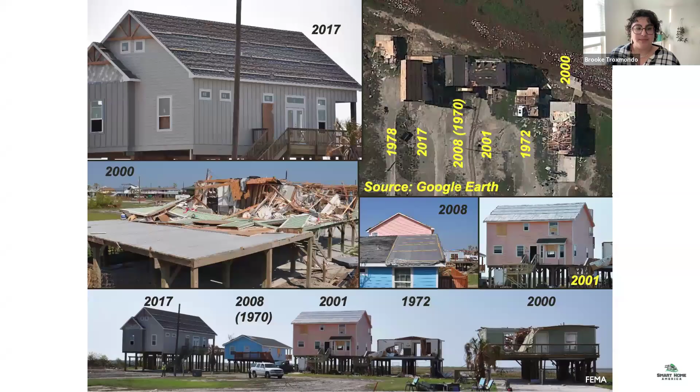Building codes are a bare minimum solution that only work when they are enforced. This picture illustrates how building codes are meant to work.

All of the houses pictured here went through Hurricane Laura in 2020, and as you can see, the more recent the building code, the better the house fared. At the top left is a house built in 2017. It did very well structurally, but if you look closely, the roof panels are missing. The decking is still in place, but the metal roof panels originally secured to this house are gone. Because of the loss of roof panels, it's likely this home had water intrusion through the roof and extensive damage inside. If that was the case, insurance may have still declared this home a total loss, despite how well the exterior structure performed.

Unfortunately, just below it, the house built in 2000 was a complete and total loss—only the foundation is still standing. Looking across the row of houses at the bottom, notice the second house from the left, the light blue house, originally built in 1970 but retrofitted in 2008—it did fairly well throughout Hurricane Laura. But two doors down, the house built in 1972, you can tell by the lack of roof and the lack of doors and windows that that structure did not survive.

And the inconsistency with these results illustrates why we really need beyond-code construction standards.

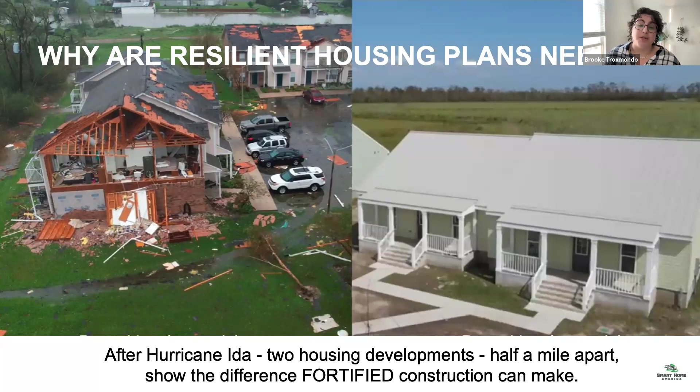For communities like Lockport, this stark comparison underscores why resilient housing planning cannot be deferred until after the next disaster. By implementing enhanced standards and strategic development approaches proactively, planning departments can significantly reduce both physical damage and social disruption when severe weather inevitably arrives.

And that severe weather really is inevitable. In 2024, there were 27 separate billion-dollar weather and climate disasters that impacted the US. And since 1980, the US has sustained 403 billion-dollar weather disasters, and the total cost of those 403 events exceeds $3 trillion.

And those are just the most expensive disasters. We need solutions that help keep us safe and protect our homes so that communities are not displaced after these natural disasters. As I mentioned earlier, building codes can be a first step, but statewide building codes are not consistently adopted throughout the United States.

And where they are adopted, they're not always enforced. And then there are the states that only have jurisdictional adoptions, and the story remains the same where there is not consistent enforcement of those building codes. Current and enforced building codes do make a difference in what communities look like post-severe weather.

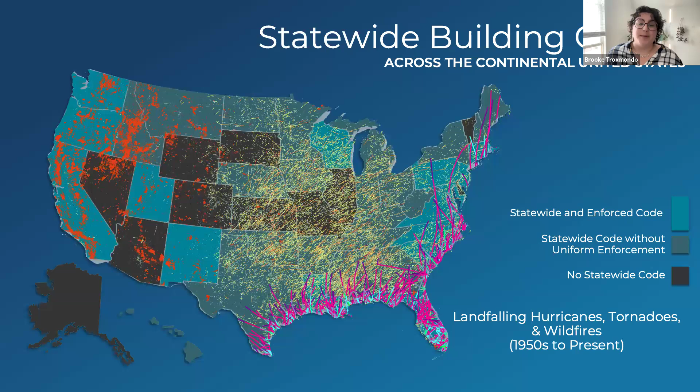So when dealing with severe weather, we need a new paradigm of recovery. And the new paradigm that we propose is intentional resilience.

Think of mitigation as your community's long-term protection plan. Investing in resilient housing, businesses, and infrastructure now means that when the disaster happens, communities can rebound faster. This can lead to dramatic savings in recovery and rebuilding costs, and neighborhoods that stay intact, leading to more resilient communities. Studies have shown that for every $1 spent pre-disaster, it saves $6 to $13 in post-disaster recovery costs. When you think about it, preparation beats reaction every single time.

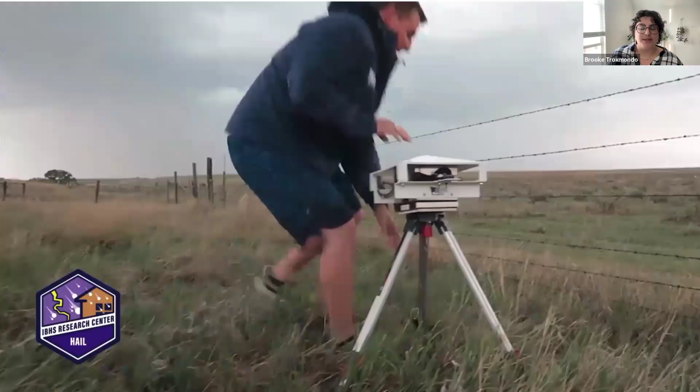So let's take a closer look at the research center. It features a 6-story test chamber the size of an airplane hangar, with more than 105 fans capable of generating 130-mile-an-hour winds. They conduct extensive research in hail, inventing new ways to generate realistic hail to support their testing. On wildfire, they are the only known facility able to test how embers interact with the built environment. They also study water intrusion through the roof and how to seal it out, and they study the effect of wind on homes to learn how to reduce loss.

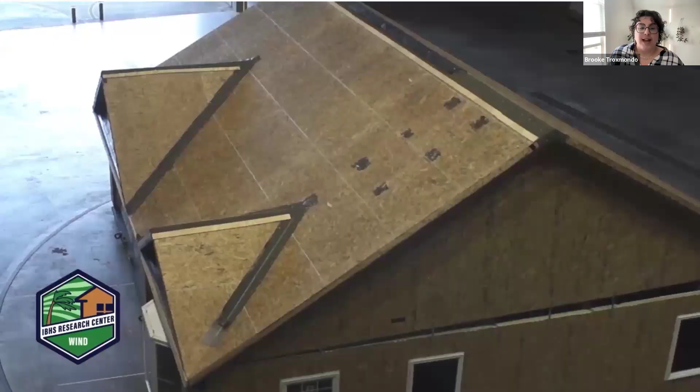Their research extends into the field, where they learn what happens after disasters. They study the effects of severe weather on commercial structures as well as houses. And at full scale, they can recreate severe weather so scientists see what fails first and understand what we can do to protect the investment of homeowners. Severe weather disrupts lives, displaces families, and drives financial loss, and IBHS brings together the science and expertise to reduce, and in some cases eliminate, costly risks.

So we're going to do a little quick pop quiz just to make sure you're awake and still with us. I know this is kind of the after-lunch hour for people on the East Coast. So the first quiz is a real easy question, just true or false: are building codes well enforced across the United States? True or false? Let's see what you guys think.

Awesome, you guys are awake and with us and paying attention. 93% of folks got that right, it's false. Building codes are not consistently enforced throughout the United States. Now I'm going to hand the presentation over to Candace to go a little bit more in depth into Wildfire Prepared.

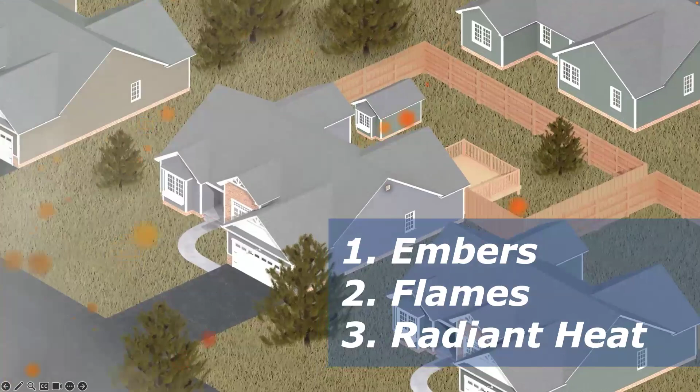So let's talk about what happens when that conflagration unfolds. Wildfires have three ignition mechanisms: embers, flames, and radiant heat. When wildfires enter a community, all three ignition mechanisms are happening and contributing to the spread. Embers are often how fire first enters a community. When those embers ignite spot fires around structures, or ignite structures themselves, those ignitions lead to more embers, which lead to more flames and more burning structures produced from that radiant heat. All three can ignite other structures, and structural embers are typically larger than vegetative embers.

Adding wind to the mix only makes conditions worse, literally fanning the flames and carrying embers deep into suburban neighborhoods. One of the most important vulnerabilities to conflagration are the connective fuels inside communities, especially the vegetation. Connective fuels can also include things like fences that create pathways for fire to spread through communities. We'll see in a minute how wooden fences can help ignite structures.

During wildfires, thousands of embers can travel more than a mile ahead of the main fire. During a wildfire, embers may collect in zone 0, which we're going to talk about and define here in just a minute, also known as the home ignition zone. And when this happens, they smolder, ultimately igniting and spreading to the home itself.

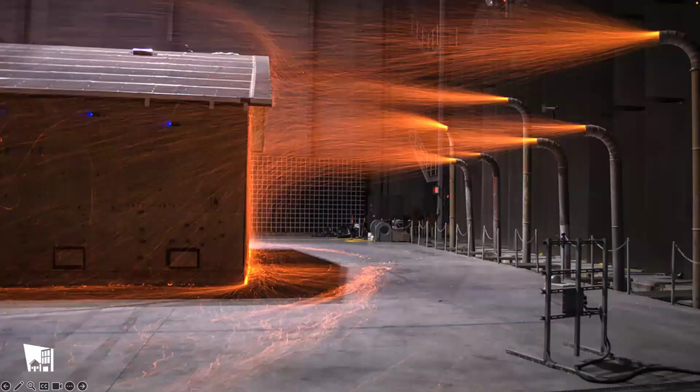So we're going to talk about 5 feet completely around the home of non-combustible space. This is the home ignition zone. Embers collect at the base of a vertical wall and in the first few feet around the building itself. That's why a wildfire prepared homeowner must have 6 inches of vertical non-combustible space at the base of the home, and then 5 feet of horizontal non-combustible space around the home itself.

Because of research like this, we know the importance of these 2 elements, which you see on the screen here. Entirely non-combustible is even better, and that's in the plus designation, which we're going to break down in a few slides. This research allows us to make the program more accessible because we understand how the home system works together. By having that 6 inches at the very base, that stops embers that have collected from being able to ignite the home itself, and the 5 feet around also keeps the vegetation and combustible materials from igniting that flame.

IBHS has taken their research and created the program called Wildfire Prepared Homes. It's a voluntary designation program, and the program is meant to make a meaningful distinction between a property that is designated and an unmitigated or partially mitigated property.

So speaking directly to the Wildfire Prepared Home, that home is going to have a Class A fire rated roof, maintained clear of debris. It's going to have non-combustible gutters and downspouts. The building features will include ember and fire resistant vents, and 6 inches of vertical non-combustible space at the base. It's also going to have a defensible space around it, including the removal of branches that may overhang your home.

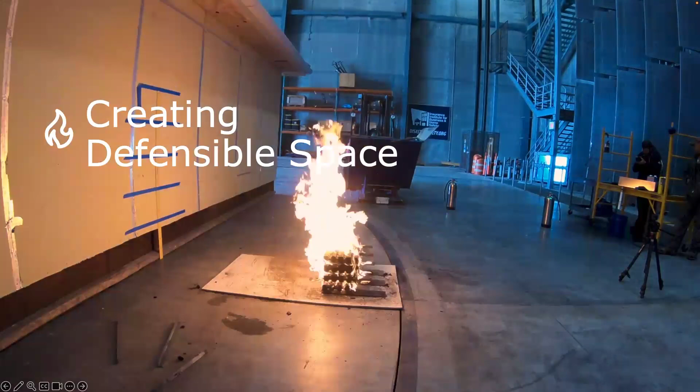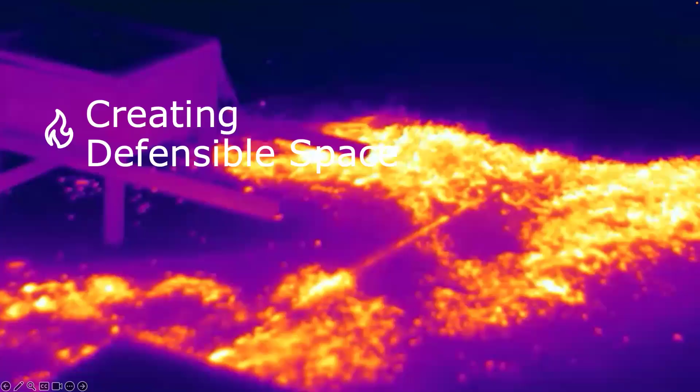Starting with the defensible space, all of the testing done by IBHS simulates real-world wildfire conditions, testing various wind speeds and directions while measuring ember ignition at different distances from the structure. The results were definitive: a 5-foot non-combustible zone provides critical protection against ember ignition. This isn't just an estimate or a recommendation, it's a scientifically verified measurement based on rigorous testing done at the research facility.

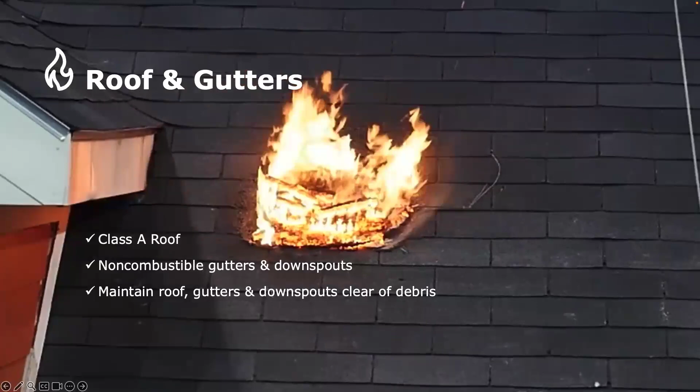The roof would be a big retrofit to a home, but it's an important one because the roof is a large surface. It's one of the most vulnerable parts of the home, especially with embers traveling far distances in front of the fire and having the potential to land on the roof or in the gutter. The embers can ignite anything combustible, like wood-shake shingles, plastic gutters, and acrylic skylights. Also, tree debris can collect in the gutters, providing fuel for embers to land on and ignite. When ignited, the fascia, the roof edge, and the attic are exposed to direct flames.

The good news, though, is that most homes already have a Class A roof. Asphalt shingles, clay and concrete tiles, metal roofs - all of those are typically Class A, and gutters are typically made of aluminum, leaving only routine maintenance to keep the roof and gutters clear of debris.

I don't know about you guys, but I keep things up there like Christmas decorations and boxes left over from packing that I don't need anymore. When those embers get in, that's a perfect - and I hate to use the word perfect - but it's a perfect storm for those embers to create a fire that just completely and totally destroys the home.

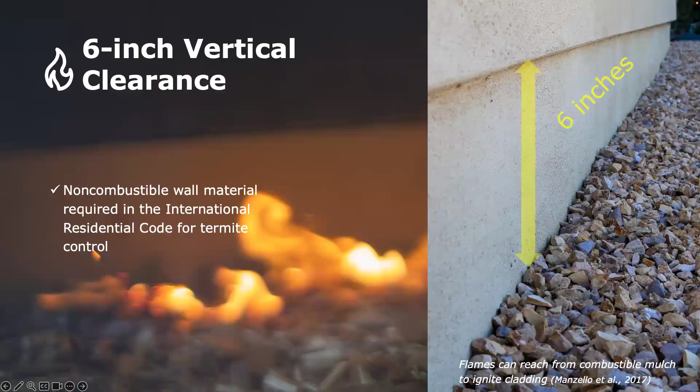A little closer look at the 6 inches at the bottom, at the base of the home - keeping that clear. In a wildfire, embers will accumulate down at the bottom and base of the exterior wall, and that's where those embers could combust the mulch, which then turns around and ignites your home. That also plays into the 5-foot zone, breaking the pathway for small flames and ensuring embers have no fuel source to land on.

Zone 0 allows other mitigations, like that 6-inch vertical non-combustible clearance and multi-paned tempered glass, to have a positive impact on the outcome of that home during a wildfire.

I'm going to show you a video now, and to me it's a pretty powerful video. It's only 60 seconds long, but I want you to really pay attention to this video and the amazement, to me, of how quickly this happens.

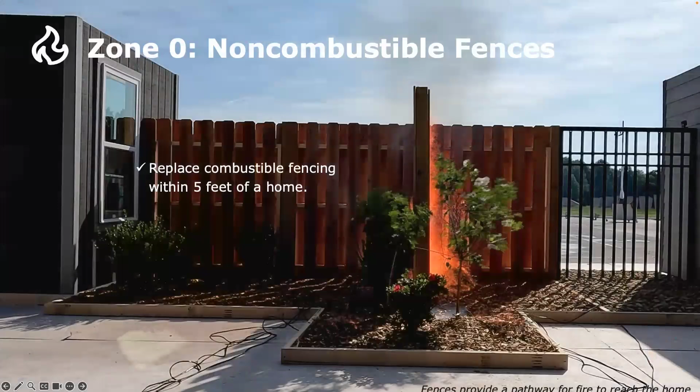When we say everything in zone 0, we mean everything in zone 0. This includes the fences that connect to your home. Simply replacing the last 5 feet with a non-combustible section or gate breaks that pathway. It doesn't give fire the fuel it needs to continue on to your home or structure. You can see the impact here in just a moment.

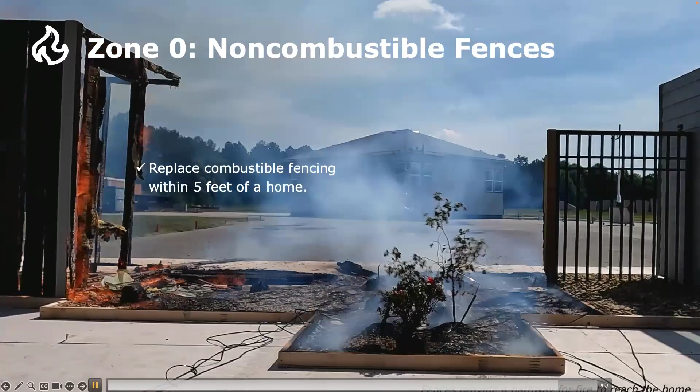Think of it as creating a fire break specifically for your fence line. Embers may still land on and ignite the wooden portion of your fence during a wildfire, but the fire will stop at the non-combustible section rather than continuing to the home's exterior. It's a simple modification that doesn't require replacing the entire fence, just the critical section within 5 feet of your house. It's an affordable upgrade that can save your entire property when wildfire is threatening your community. Remember, breaking that path of fuel means embers can't ignite the house via the fence itself.

Decks and porches that are attached to or built near your home also provide a pathway for fuel for the fire to reach your home. At a minimum, they need 5 feet of non-combustible zone around them as well. A clear area beneath the deck, enclosed to keep embers and debris out, means there's nothing to ignite and cause a fire to the structure.

Embers blown from miles away can easily start spot fires around your house. Creating and maintaining a defensible space on your property slows down the spread of the fire. By spacing out bushes and trees, you're also removing the ladder fuels that allow fires to spread, reducing the intensity of the fire near your home.

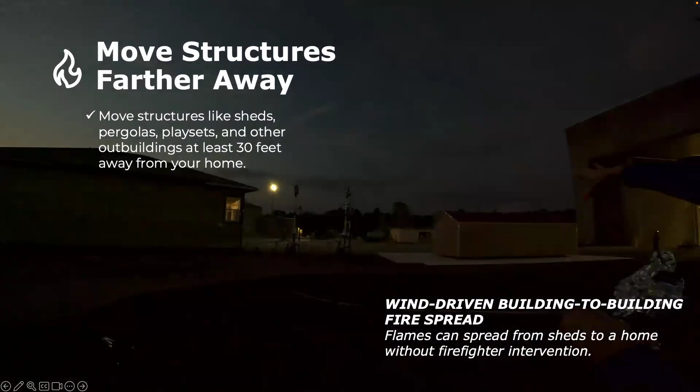This video is of one of the first IBHS experiments done with wind-driven building-to-building fire spread from auxiliary structures, like man caves, she sheds, where your gardening materials are, that sort of thing. Burning the sheds, pergolas, play sets, any other structure, wooden play sets, doll houses, increased the risk to the home because of the additional radiant heat and flames, and also the embers that are produced. If you move these accessories further away, you are better protecting your home in the long run.

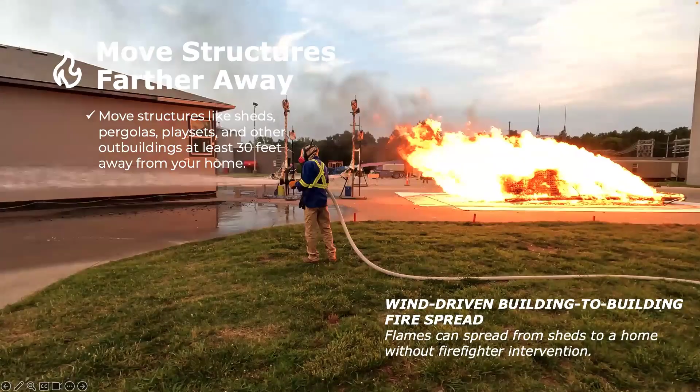Adding gutter covers reduces maintenance by keeping tree debris out. These covers prevent the accumulation of dry leaves, pine needles and twigs that could serve as kindling for flying embers during a wildfire event. By eliminating this potential fuel source from your roof's edge, you substantially decrease one of the most common ignition points during a wildfire. I have pine trees all around my house, and nothing is more irritating than having to get on the roof and get those pine needles out, but it has to be done. By doing that, you're significantly reducing the chance of ignition from those foreign materials.

Radiant heat can build up in an open eave and ignite exposed materials. Flames from nearby fuel sources, such as sheds or vegetation, can ignite those eaves. Radiant heat, embers, and flames can also ignite combustible siding. Replacing all combustible siding provides greater protection against flames and radiant heat. Flames can spread across combustible siding to reach other vulnerable areas like windows and eaves, which can begin a cascade of damage to the home.

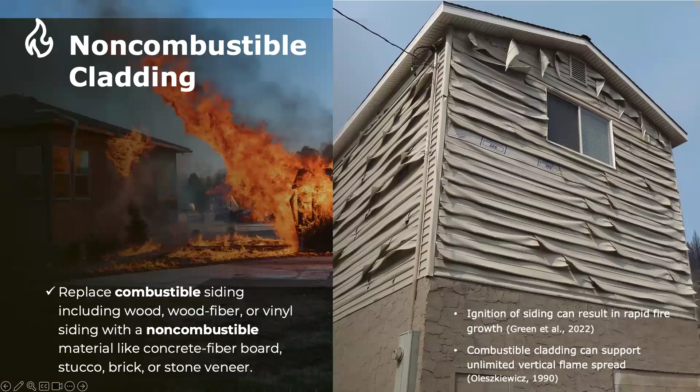Upgrade to solid doors that have a metal threshold and are constructed with a non-combustible or ignition-resistant material such as metal, fiberglass, or solid hardwood. Remember that 6 inches worth of space that we mentioned. We want to stop those embers from even getting started to begin with. By putting one of those metal, fiberglass, or solid hardwood doors on there, you are lowering the chance that those embers will be able to start a fire in the first place.

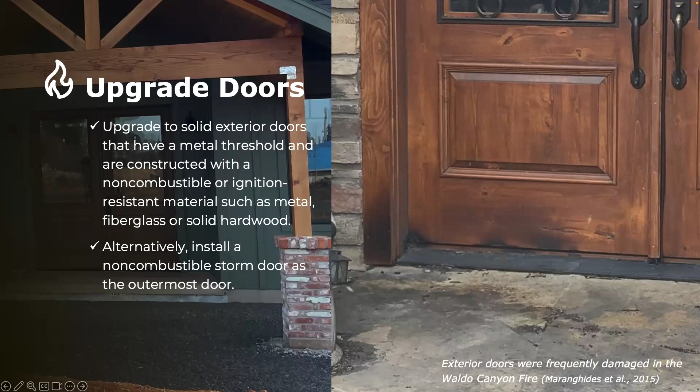Alternatively, you could install a non-combustible storm door at the outermost door of your home. Replacing that combustible siding, including wood fiber and vinyl siding, with a non-combustible material like concrete fiberboard, stucco, brick, or stone veneer is also recommended.

So this is a video that's going to start here in just a second. We're looking obviously at the attached deck in this video. It's a vulnerable point on the home and can be a pathway to carry the fire to your home itself. If you look at the mulch, you can see the black circular areas where vegetation has been ignited. This represents how embers can start spot fires, and when given a pathway to the home, can present a risk for ignition of the home itself.

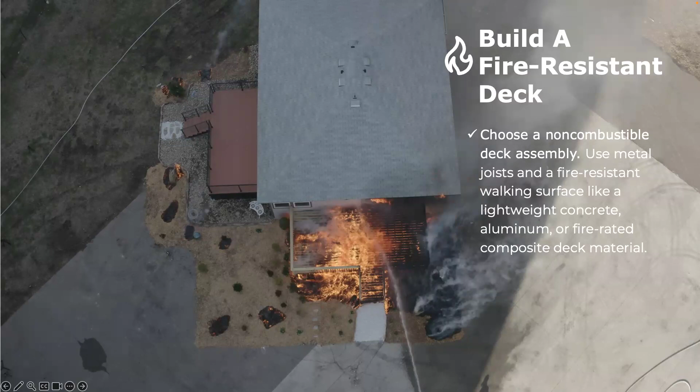Notice on the left-hand side, it has that 5-foot non-combustible zone surrounding a non-combustible deck assembly. That's eliminating the combustible material, which creates that protective barrier on your home. So by putting that barrier up and using a non-combustible material, you're stopping that fire from being able to get to your home from the very beginning. If you look over here, you can see where some of those spot fires were, and you see how close they got, but also how far they were kept away from the home.

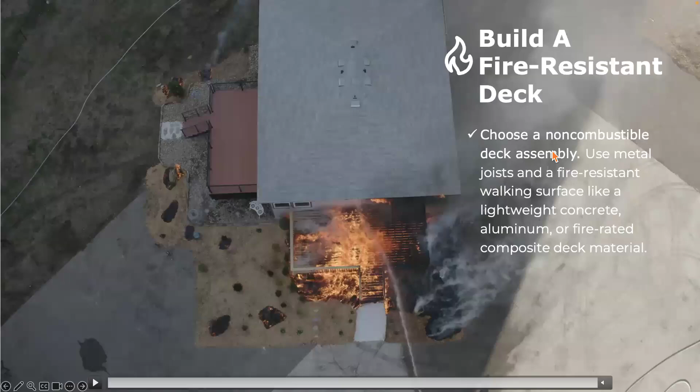Back-to-back fencing, in those gaps that are there, you can get debris trapped - limbs, pine straw, trash, anything along those lines - and it creates a vulnerable fuel bed to ignite both fences. The two fences together provide even greater fuel for an even more intense fire.

IBHS has a thorough process for issuing designations to make sure that homes meet the wildfire prepared standards. Again, all of these standards can be found on the Wildfire Prepared website. Yet receiving a designation is honestly just the beginning. There are ongoing components to the program because of maintenance required to maintain that designation. So it's not just a one-and-done kind of thing.

Property owners would be responsible for maintaining the designation. And I always like to make sure, especially when I'm talking to developers or builders, that you are aware - yes, doing these things in the beginning is great, but you need to be sure that if you get these designations, whether it be this one or the one we're going to talk about with the high wind standards here in a bit, make sure that the homeowners are aware and understand what they need to do to continue to keep that designation.

To get started, the Homeowner's Guide explains the technical requirements of the program, why each of these elements matter, and all the things that the homeowners need to know, honestly. It even explains how a golf tee can be used to make figuring the vent compliance a little bit easier. While the information is geared towards homeowners, because a lot of this can be a DIY mitigation approach to a point, builders and developers can use the same resources to implement wildfire prepared homes for customers or for projects that you are working on.

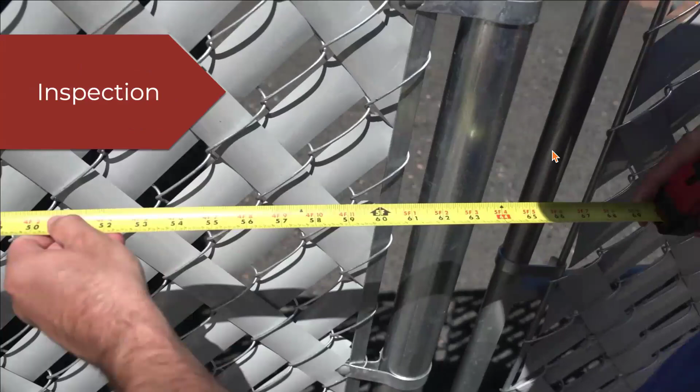Then the homeowner is going to submit their application into the system. Once that application has been submitted, an inspector will come out. A home inspector will visit the property and do a walk around to verify that everything from the home assessment is accurate.

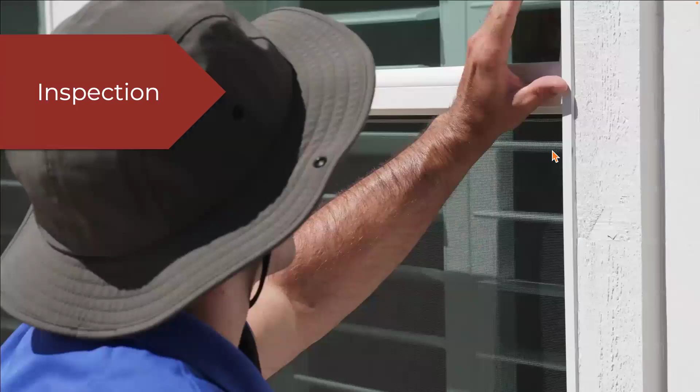You can see this inspector out with a measuring tape, making sure there's at least 5 feet or more. They're measuring the distance for the zone around the gate to stop fuel from coming from the wood fence itself. The company used by the IBHS program, they are the inspectors that come out.

Step 1 is to choose a time that works best for you to get on a call with the inspectors. They'll collect some basic information, answer any questions, and schedule a consultation. During the consultation, a wildfire risk specialist will assess the property and provide guidance to help you along the way. You'll get a digital report and a custom treatment plan that prioritizes actions to protect your home or to meet the insurer's requirement, including the wildfire prepared home designation.

Step number 3 is take action with simple projects. Some of them can be tackled over a weekend, or you can get help from a vetted contractor to help ensure that the job is done right the first time.

Then we move to step number 4. When you're ready, you schedule a final inspection with the company to document everything for your insurer and or to go ahead and submit it for the wildfire prepared home certification.

IBHS will then take the documentation submitted by that third party inspector and issue a designation. The designation demonstrates that the homeowner is committed to wildfire resilience, differentiating properties that have implemented advanced wildfire mitigation methods versus those that have not.

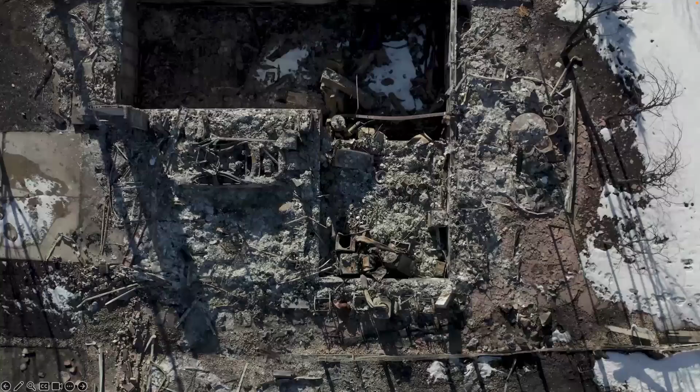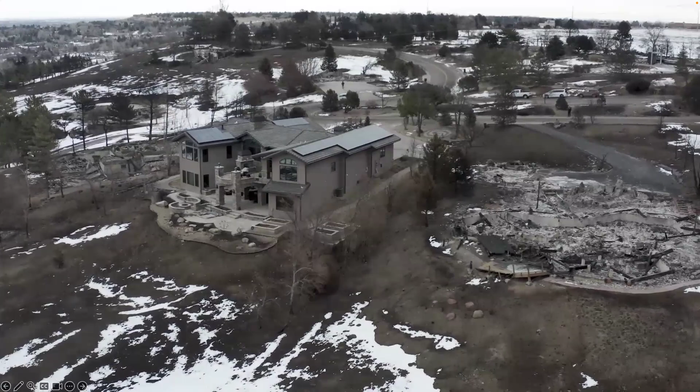When we put all of these factors together, you can get devastation, or you can significantly increase your chances that your home will survive. Dr. Jack Cohen, who many consider the father of wildfire science, says community wildfire risk should be defined as a home ignition problem, not a wildfire control problem. That is to say, we can't suppress or control our way out of a wildfire crisis, but there are things we can do and policies states can embrace to help reduce the likelihood of neighborhoods looking like what you see on the screen here. Sorry, my brain gets lost sometimes just seeing the devastation and destruction these fires can cause.

To advance resilience, we believe three tools are necessary: a statewide WUI code, statewide defensible space requirements, and financial incentives to help homeowners retrofit their existing homes. California is leading the way with a statewide WUI code and a grant program for resilient retrofits. Because mitigation at the neighborhood scale is so important, we recommend taking a clustered approach to grants and incentives to help the whole community act together.

Voluntary designations are helpful, but they're not enough. We also need wildfire policies at the local, state, and federal level to reflect what science currently tells us about how to prevent homes from igniting during a wildfire.

So we are going to have another pop quiz. I know we gave you a lot of information, but it's just going to cover the things I've talked about with you thus far. The question is, how much space around a home should be completely non-combustible? Is it 3 feet, 5 feet, 7 feet, or 9 feet?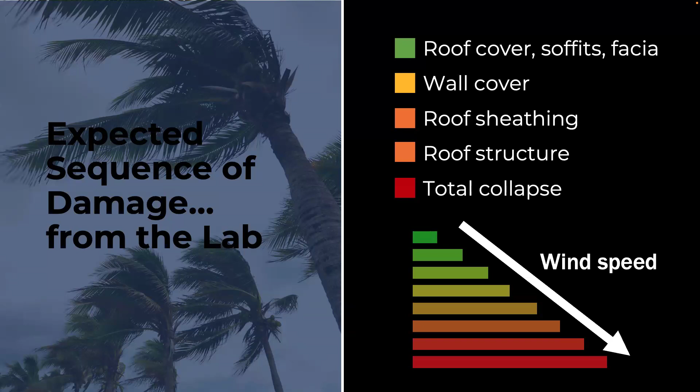So like I mentioned: roof, soffits and fascia, the wall cover, roof sheathing, and the roof structure. And then the final step is total collapse of the home or built structure.

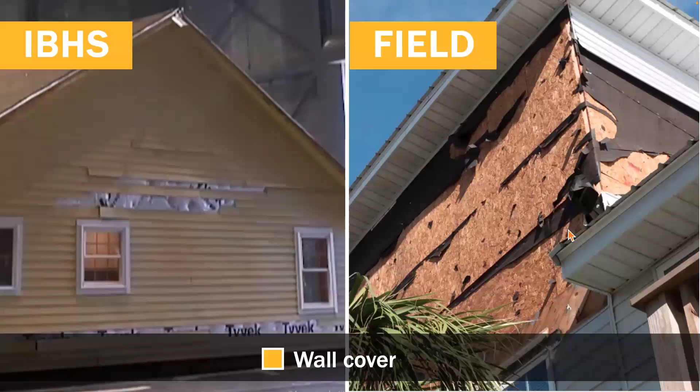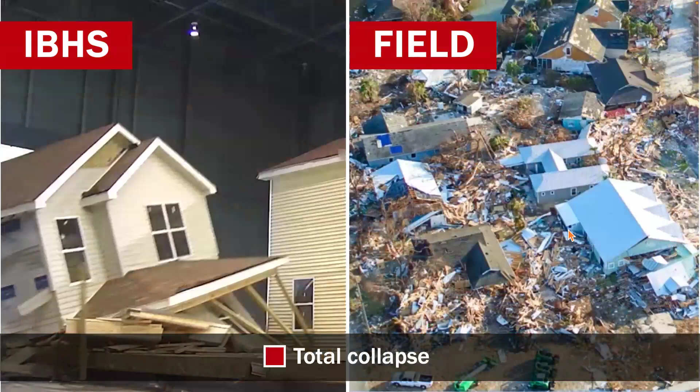So we also have some pictures that really emphasize how the research done at IBHS is supported by what we see in the field after a disaster. At the lowest level of high winds, we have the roof cover, soffits, and fascia affected. Then as the wind speed increases, the siding and wall cover can start to be affected. As wind speeds continue to increase, roof sheathing and the roof structure can be destroyed. And at the highest wind speeds, the buildings can completely collapse and be blown away.

So this is really important to notice how closely the damage we see in the IBHS research facility mimics the damage we see out in the field. And it really supports the validity of the Fortified and the Wildfire Prepared Home standards.

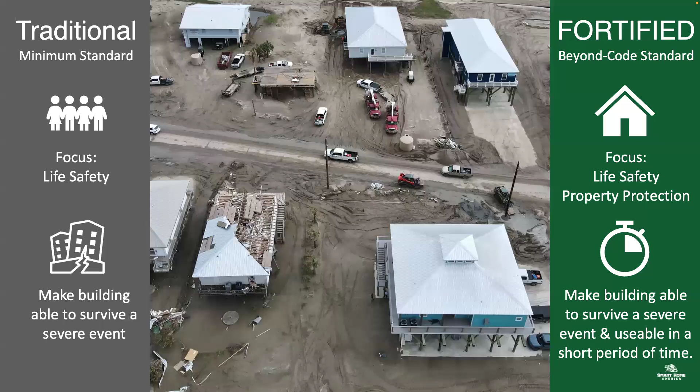However, Fortified really tries to protect both human life and the property itself. The goal is for the building to survive a severe weather event and to be reusable quickly by protecting the interior of the building and its contents. And I'm going to hand it back over to Candace, as she's going to go into a lot more detail about what these fortified standards are and how you can use them.

And we're not just talking about hurricanes here, we're talking about high winds, whether it be tornadoes, straight line wind, derechos — all of that is included in that protection.

We can't prevent all of the damage that you see here. In May of 2013, a devastating EF5 tornado ripped through Moore, Oklahoma. We can't prevent the EF5 damage that you see on the screen right now, but what we can do is address some of the damage that you're going to see in the EF3, and we can totally eliminate the damage from the EF0, EF1, and EF2 lines of damage.

When that tornado came through Moore, Oklahoma, when it touched down, the total path of that tornado was 17 miles. Of that 17 miles on the ground, less than or right at 0.0012 square miles were actually affected by the wind speeds that would equate to EF5. And for the EF4 wind speeds, it was 0.46 square miles that were affected. So less than half a square mile was actually affected by those EF4 and EF5 winds.

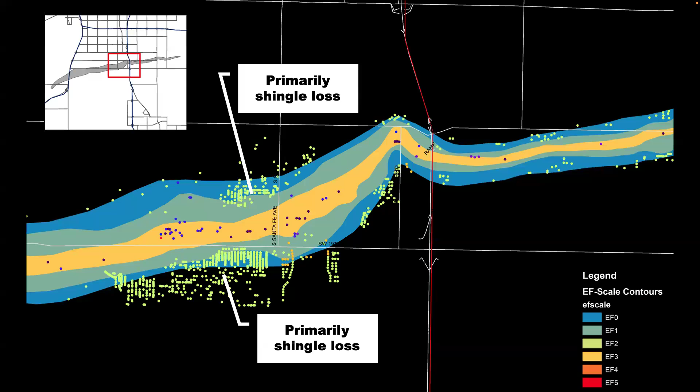Homes that might have sustained just minor damage and been livable instead become uninhabitable due to the water intrusion coming into the home and the need for sheetrock to be pulled, carpet to be replaced, and all of the belongings to be replaced. Residents who could have remained in their house despite the exterior damage now become displaced. Building to the fortified standards could help communities stay intact after a tornadic event.

46% of single-family home damage modes are addressed in some element of fortified, based on that Moore, Oklahoma EF5 tornado.

You've heard me say the word fortified home quite a bit, and you heard Brooke say fortified as well. What is fortified? It's a voluntary program verified by an independent third party. There are 2 standards, hurricane and high wind, and 3 levels within those standards: roof, silver, and gold. Each fortified level builds on the one before it. Therefore, all fortified homes have that fortified roof designation. A silver designation will also have a fortified roof, and gold will have both silver and roof involved with it.

If you live along the coast, you're going to be under the fortified home hurricane program. It's very similar to the fortified home high wind program, and we'll talk about the differences in just a second between the two. A fortified roof will keep the roof on and keep the water out.

When we address fortified silver, it's looking at reducing the damage amplifiers, like the garage door Brooke showed us a photo of. You still have that fortified roof, and you're adding strengthening to the gables, a wind-rated garage door, securing the chimney to the house, and anchoring your porches or carports. For hurricanes, you must also have opening protection against debris impact with some sort of hurricane shutter.

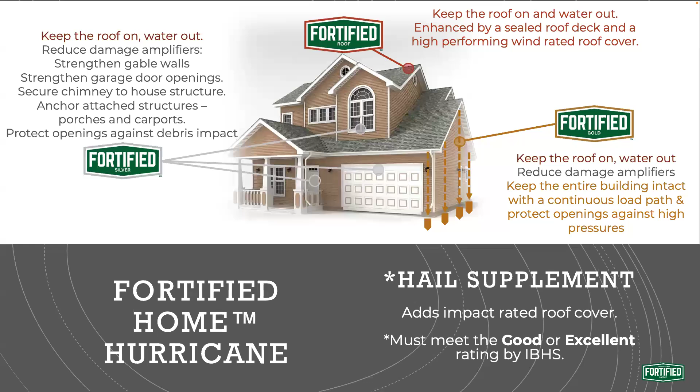For fortified gold, we're including all of those things we just talked about, but we're incorporating a continuous load path and protecting the openings against high pressures. For all levels of fortified, there is a hail supplement that can be added. This adds impact-rated roof covering, which must have met the good or excellent rating designated by the Insurance Institute for Business and Home Safety.

For the fortified home high wind standard, we're looking at keeping the roof on and the water out. It's got an enhanced roof deck and that high performance wind rating. For silver, it's the same as the roof, but then we're reducing those damage amplifiers: the gables, overhangs, securing the chimney to the house, and anchoring the structures, porches, and carports. With fortified gold, it puts that continuous load path in. Keep in mind the hail supplement is also available for this high wind standard.

High wind is going to be more for your inland areas that are more likely to be affected by tornadoes and straight line wind. All of those are going to fall into that category.

So let's start with the fortified roof. There are 3 principles we look at: we want to nail it down, seal it up, and lock it in. With nailing it down, fortified roofs require that the roof deck be re-nailed with 8D ring shank nails. Ring shank nails and a tighter nailing pattern are used to double the strength of the pull off, or uplift resistance, just by using a different nail than the common smooth nail, and putting a tighter nailing pattern into the rafters. So when wind gets into the attic, you've got that extra protection to keep and hold the roof deck onto the house, because the roof is such an important piece to the puzzle.

We talked about this already, should have clicked the button, my apologies. Here's a shot of that 8D nail. If you look closely, the difference between a smooth nail and an 8D is the grooves on the nail. One of the other requirements for the nails is that it has to be long enough to have appropriate penetration from the roof deck into the rafters.

Staples and 6D nails are not allowed in the fortified program. Here are some examples for you to see of roof decks that were damaged or torn off because they were not fastened adequately. That's a lot of space for water to come into the home, especially that picture on the right.

Keep in mind that most of the time wind is not just falling straight down onto a home, it is coming at an angle. That is a huge gap for water to be able to get underneath that roof deck. And if you look at it, you can see where that roof deck has bowed, so we know there is water damage on the roof deck and on the inside of it.

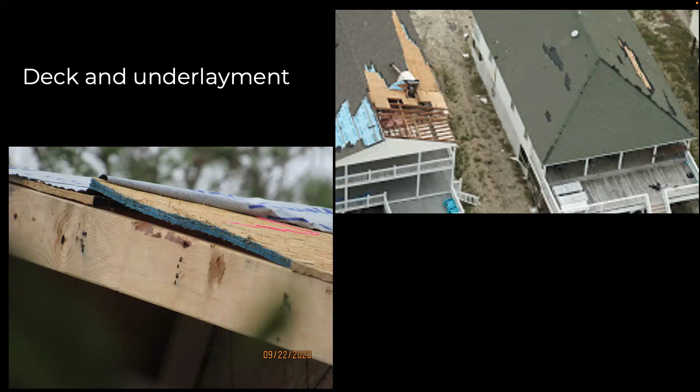The next piece here is going to be keep the water out. From the looks of the screen, where it's highlighted, you can see that black tape over the seams of the roof deck. I'm going to show you a demonstration here in just a second, and pay special attention to the left-hand side as this video gets moving.

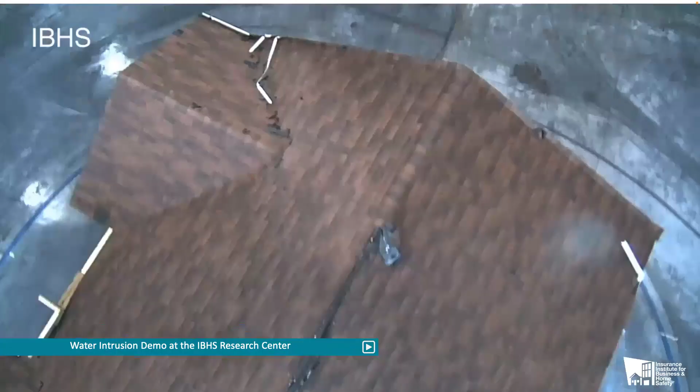That's where you'll see the tape on the left-hand side. So for water intrusion, if 60% of the 8 inches per hour of rain hitting this house, which is 7 bathtubs, is getting in once the roof covering is lost, and sealing the seams of the roof deck can keep up to 95% of that water out, why would we not do it? Especially if it's going to cost you $500.

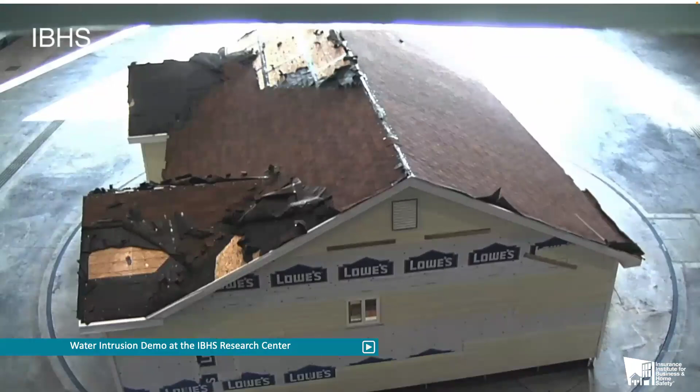This duplex was placed inside of the research facility. It is built to the exact same standards on both sides, the standards usually seen around the Gulf Coast and Atlantic regions. The home is put on a railroad car turntable so the house can be twisted and turned, so all sides can be hit equally with the same amount of wind and the same angle of water hitting the home.

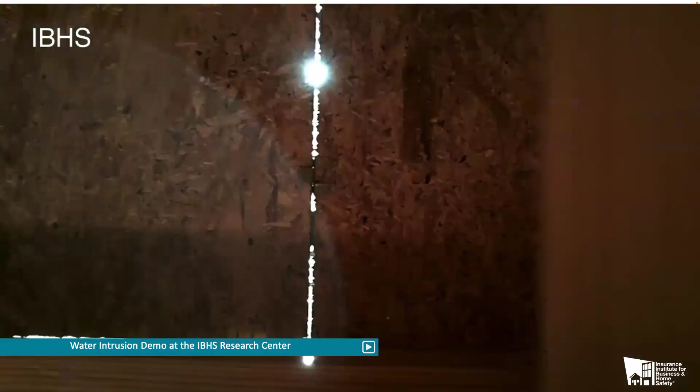You can see that the home was furnished with complete furnishings. We have the light fixtures that the water is pouring around. Good shot of the gap in that roof deck and how easily water gets into it. So they hit this house on both sides, and they got a shot here of the water coming through into the insulation and weighing it down.

This is the result on the right-hand side. The insulation gets heavy, it causes the roof to collapse and fall in, which leads to more water intrusion if this happens before the rain stops. There's no way that this home is livable directly after the storm. A family could not come back and be there.

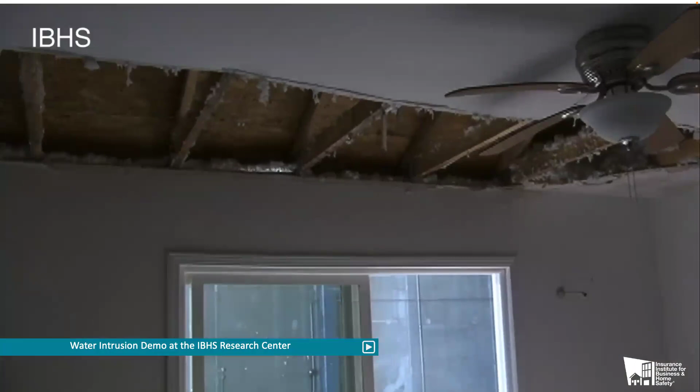On the left side, which had less than $500 worth of tape on it, it looks really good. If you were paying close attention, you would have noticed a little bit of insulation on the floor, on the bottom left-hand side of the screen. That came because wind got into the attic and blew the insulation on the dry side around, and when they opened the hatch, that insulation came through.

The moral of this, though, is that after the test was shut down and individuals were able to walk into the home, that left side was completely dry. You could sit on the couch, you could sit on the bed, your clothes would not get wet. The belongings inside were not damaged, they weren't ruined. Nothing needed to be replaced as far as that goes on this side of the duplex.

Had someone been living in this home when a storm, whether tornado or hurricane, came through, that family returning would have had a place to live. They would have had a safe place to live. They may not have had water or electricity, but they would have had a place to start the rebuilding process for the rest of the community.

After the test was complete, IBHS brought in an independent insurance adjuster to look at the home. What they found was a huge difference. This test was originally done in 2011, and the dollars have been adjusted to 2020 inflation, so being that we are at 2025 now, that number would be higher. The damage estimates for the left-hand side were just over $6,000 compared to the damage estimates for the right-hand side with the unsealed roof deck.

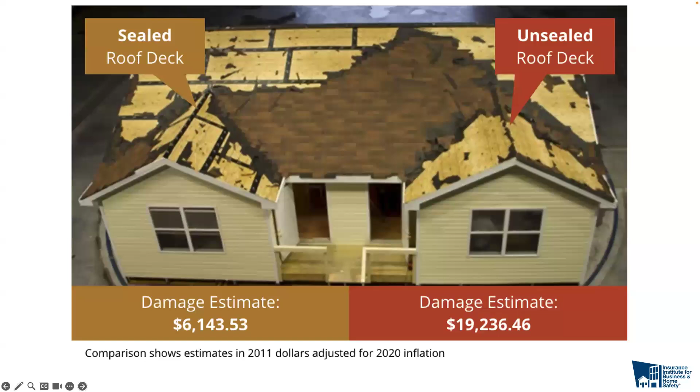So let's look at how we can achieve that sealed roof deck. With an underlayment laid on the roof deck, that underlayment should be installed at 4 inches on a horizontal overlap at the top and bottom with 6 inch end laps.

At the top of the roof, the underlayment should fold 6 inches over the ridge on both sides. Nails should be spaced every 6 inches on center at the horizontal laps and end laps, and 12 inches on center both horizontally and vertically in between laps, or in accordance to the manufacturer's requirements, whichever is more stringent.

Cap nails should be held off the edge by 4 inches to allow the drip edge to be installed over a smooth surface. The drip edge will hold the underlayment in place, and we're going to talk about the drip edge here in just a little bit. But that drip edge should be able to be installed over it.

Underlayment products come in different widths, and fasteners must be installed at a maximum of 12 inches on center, which means that there may be more than 2 rows of fasteners in between the courses of underlayment.

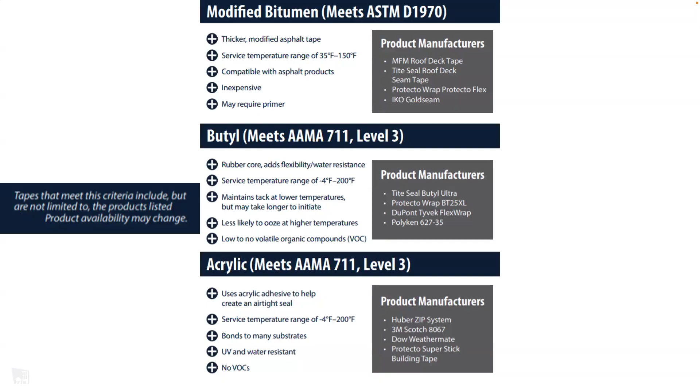The next option that we have for a sealed roof deck is going to be the fully adhered membrane. The fully adhered membrane is a bit simpler than the underlayment, but it is a more expensive system. The entire roof is covered with this membrane. Because it's fully covered, the roof can also be used with tongue and groove or dimensional lumber.

It's recommended that if you're putting asphalt shingles over a fully adhered membrane, you use some sort of synthetic underlayment as a bond break, because it could potentially cause problems when it comes time to change that covering that's on the roof.

The advantage of the system is that the installation is easier, with complete coverage allowing for that tongue and groove. The disadvantages would be that it's more expensive, and it could pose challenges when it comes time for the re-roof. There are a few products that cannot be used over a fully adhered membrane, like cedar shingles, which could not be laid over a fully adhered membrane.

So here's just kind of a shot. If you don't know what a fully adhered membrane is, you've probably been driving down the road and seen what looks like almost like a patterned blanket over the roof, and that's going to be that fully adhered membrane.

The next is going to be 2 layers of organic 30-pound felt. This application requires a specific nailing pattern, and the layers must be fully overlapping one another. The advantages to this system are that it has complete coverage, allowing it to be used again on that tongue and groove roof, and it's less expensive than a fully adhered membrane.

The disadvantage is going to be the training that is required, because it does have a very specific nailing pattern that has to be used on it. So with everything in life, there are going to be advantages but there are also disadvantages. It can be done, just know that there is a very stringent nailing pattern on it.

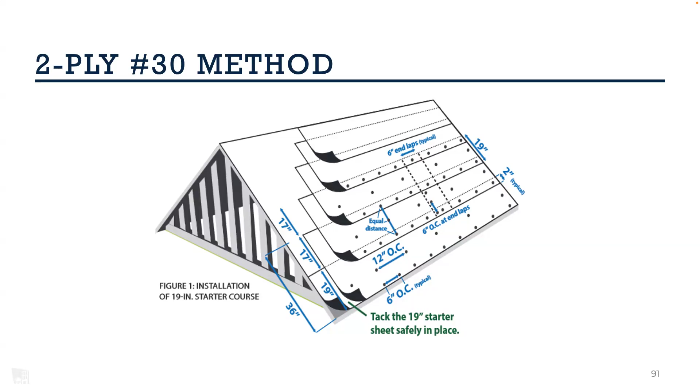The underlayment must be attached using annular ring or deformed shank nails with sufficient length to penetrate through the roof sheathing, with a minimum 1-inch diameter metal or plastic button cap. Staples cannot be used. Metal cap nails are required for ultimate design wind speeds of 160 miles per hour or greater. For homes located within 3,000 feet of a saltwater shoreline, those fasteners have to meet corrosion protection requirements to be allowed on that roof.

The last one I'm going to talk about is the spray foam adhesive used. It can be used, but it must be tested and evaluated in accordance with ASTM E330 or TAS 202-94 criteria, with a minimum allowable design uplift pressure greater than or equal to 110 PSF, and the proof test pressure achieved without failure or structural distress must be greater than 165 PSF. This spray foam adhesive has to be a 2-pound component polyurethane spray foam system, with a minimum core density for it.

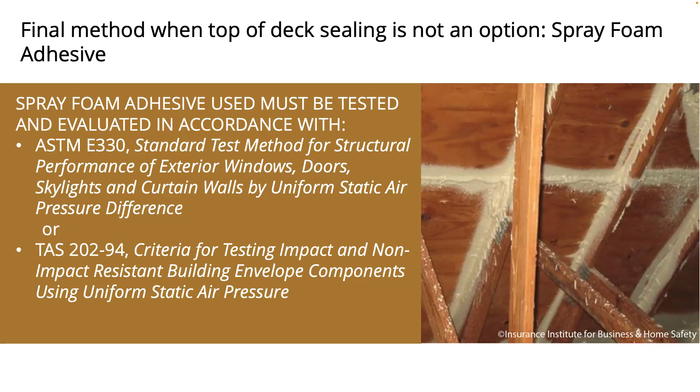Brooke did a great job talking about building codes earlier, and I'd like to add one more thing to what she had and the information she provided. Even if the building codes are well enforced, roofing is often not addressed with the building code officials.

Again, the largest payout for insurance is for damage caused by that specific water intrusion. And that sealed roof deck, by putting it on there, you're cutting 95% of the water that would have gotten into your roof. You're cutting that out, which stops the need for these items to be replaced.

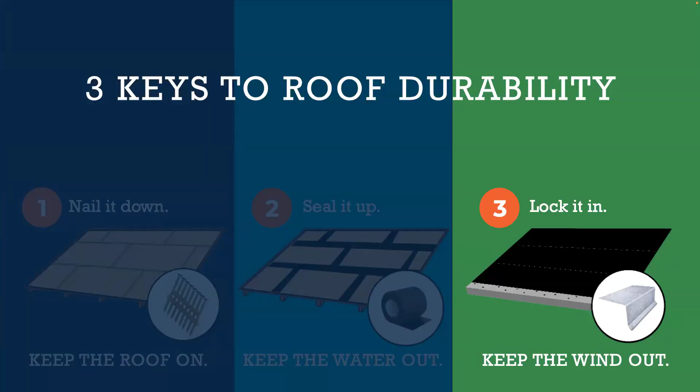So the last piece of the roof is going to be the drip edge itself. A drip edge is a type of material, a metal flashing that is installed at the edge of the roof, and it helps control the flow of water away from the fascia, and it protects the underlying roof components.

With the fortified standards, the drip edge is put on a little bit different than what you may have normally seen. The drip edge is located on the perimeter of the roof, which is the most vulnerable area, as we're going to see here in just a little bit with another animation. This is where the roof experiences the highest wind pressures, it's the weakest point of the roof as far as wind pressures are concerned.

In the fortified standard, the drip edge holds the sealed roof deck in place, and it serves as an anchor point at the edge of the roof covering system. A drip edge is required by current versions of the IRC, however its use may not be required in every jurisdiction, or it may not be regularly enforced. But even where it's not enforced, it's not against the rules to put one on there, regardless of whether it's in the code or not.

So I want to show you what a poorly attached drip edge can do. If you look at the picture on the screen right now, toward the bottom you'll see two nails spaced pretty far apart - I don't have a measuring tape on it, but that looks like a pretty good distance. Then you'll notice the next nail is placed all the way up here. That's a lot of space for this roof to be vulnerable to peeling back, allowing the drip edge to affect the rest of the roof covering.

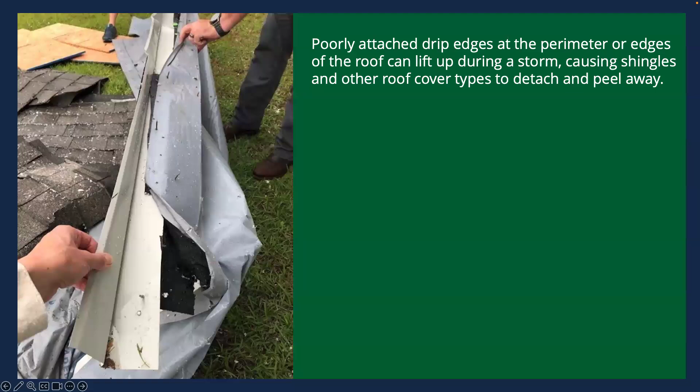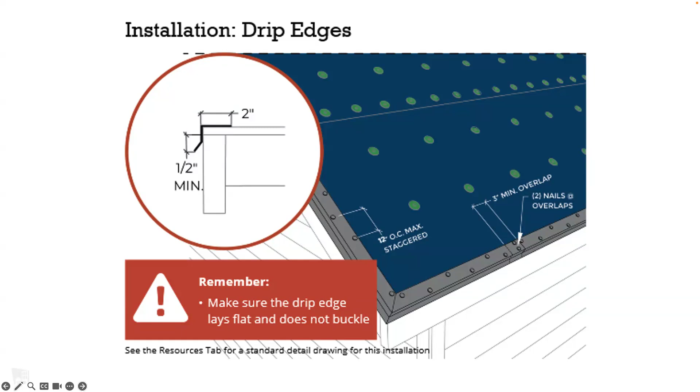With a fortified drip edge, there are some key components that make it more structurally sound. The drip edge is nailed in a staggering pattern, and the nailing pattern is a lot tighter than what you just saw in that picture. Where sections overlap with each other, they must overlap at least 3 inches, and they must be fastened with a minimum of 2 nails in the overlap, depending on how wide the drip edge itself is.

So before the drip edge actually gets nailed down, if asphalt shingles are being placed onto the roof, the shingles along the perimeter of the roof must be adhered to the roof itself. There are 2 ways to achieve that. The first is by adding an 8-inch wide strip of flashing cement for the first course of shingles to be laid on. The second is a fully adhered starter strip of shingles put onto the roof. It's not acceptable to lay the first course of shingles directly over the felt or over a membrane.

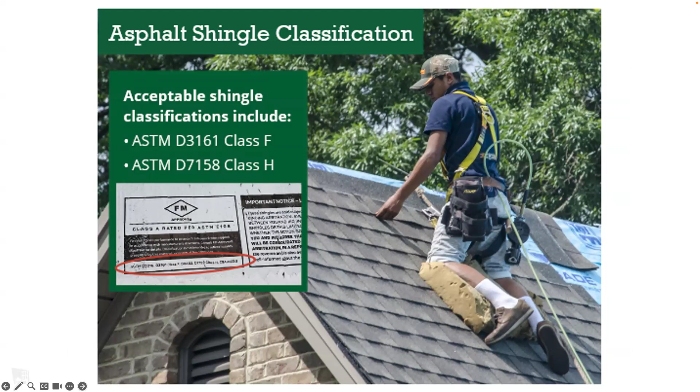So a sealed roof deck underlayment with the drip edge itself, and you add that starter strip and the roof shingle. Basically what you've got there is the load path for the roof covering. Asphalt shingles are the most common roof covering. Class F and Class H wind resistance are both acceptable for the fortified program.

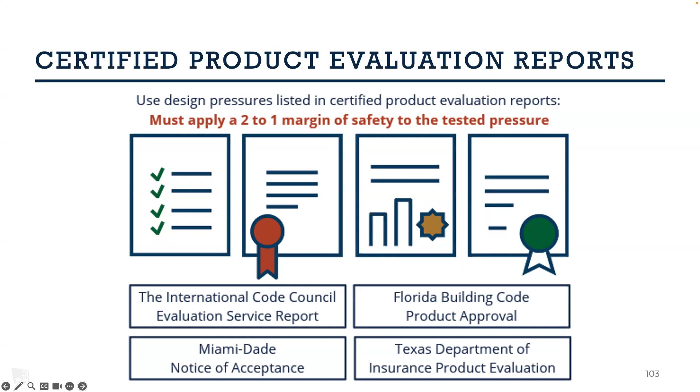It's important to verify that the materials being installed anywhere on your home have been tested and determined for how they stand up to the wind. If you have questions about certain products' testing, you can always check with the Fortified Evaluator, which we are going to talk about here in a little bit. They are your on-site eyes and ears to make sure that everything the contractor is doing is being done to the fortified standards, but they are also there to double check these materials.

That hail supplement I mentioned is optional, not required, but it can be put on there. Keep in mind, if you are going for a hail supplement, steep slope needs an impact rated roof covering, and low slope has to be the impact rated roof covering as well. If there are any skylights on the home, those skylights have to be impact rated. And if there are any solar panels installed on the home, those have to be impact rated too. If you're putting any of those on the roof, then we need to also make sure they are installed correctly on the roof so as not to cause a problem with the integrity of the fortified roof.

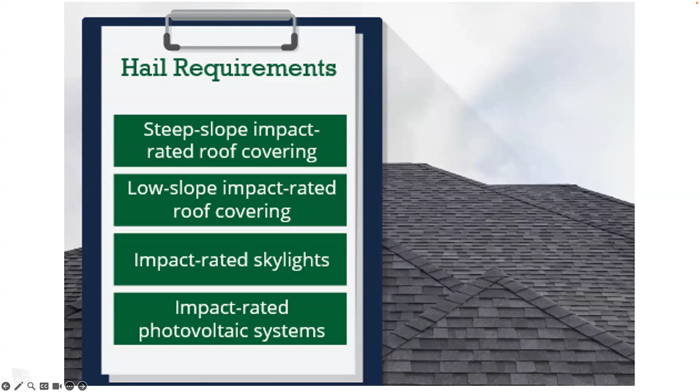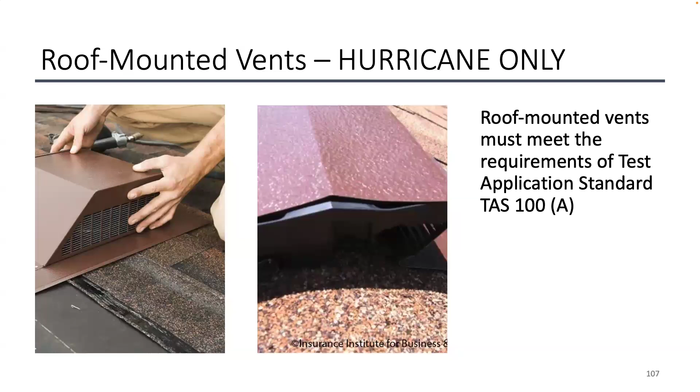All roof-mounted vents installed on a home seeking a fortified home designation with a new roof must have documentation to show that they have met the requirements for TAS 100A. That's a testing standard referenced within the Florida Building Code for you to be able to find what those standards are. This standard details the testing procedure for wind and wind-driven rain resistance, as well as the wind speed resistance of soffits, ventilation strips, and the continuous or intermittent ventilation system installed on the ridge area. The documentation for this requirement is most likely accomplished by obtaining a roofer compliance form from the contractor themselves.

If you are in an area prone to hurricanes, then you're going to have some sort of covering to put over the gable end wall vent. The gable end wall vent is generally a pretty large opening on the home. The key, of course, is you don't want to leave that covering up year round, so the key is going to be the permanent anchoring being on the home. With that permanent anchoring on the home, you can take the covering down in between weather events. This is not a requirement in high wind areas, because no one expects someone to climb up on their roof as a tornado is barreling down on them to make sure the gable end is braced. At that point, it's get you and your family to a safe spot.

So now we're going to look at the silver, fortified silver, which is going to address those windows and doors, garage doors. It's going to address porches and attached structures. And where it is applicable, we're going to look at the gable end bracing.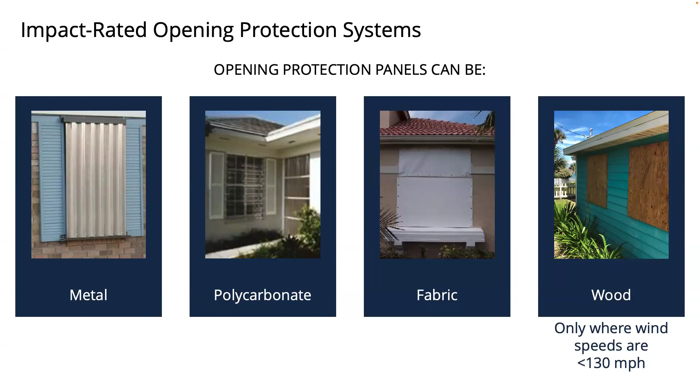The next piece for the silver is going to be the attached structure requirements. Each connection on an attached structure must be strengthened to resist wind pressures and minimize the chances that it will become a damage amplifier like the garage door we just saw. The connections that need to be in place to strengthen the structure itself are going to be roof or trusses to the beams, to the column or walls, and finally the column or walls to the foundation. It all needs to be strapped to resist the wind that is coming through.

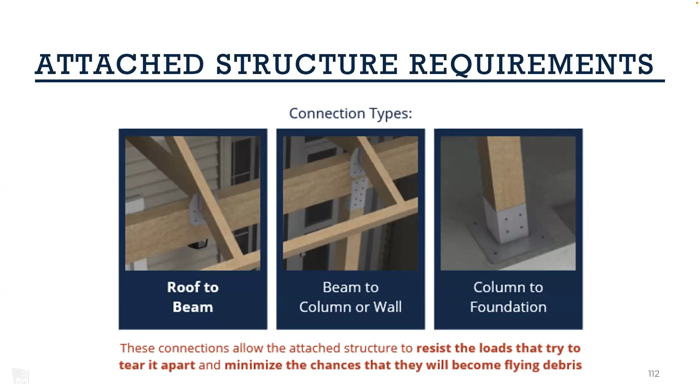So the next slide is a video. IBHS moved a mobile home inside of their research facility. The first set here is going to be of it not attached to the fortified standards, and the wind on this first test is going to be at 80 miles an hour. It happens pretty quickly, so it shows it in slow motion first, and then we get into the full speed version of it, but it happens pretty quickly.

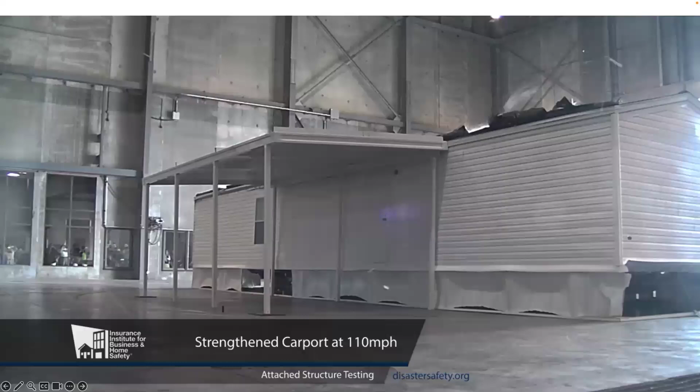So they went back and they attached everything correctly. They upped the speeds from 80 miles an hour to 110 miles an hour, and you can see how the roof stayed intact. It did not lose its connection. The shingles on that home did not come off, meaning that the water from that wind event was not able to get inside of that home.

One more time, a quick view: 80 miles an hour, improperly connected; 110 miles an hour, properly connected.

The next piece of fortified silver is going to be the gable ends and the bracing. If the gable end is 36 inches or taller, then there is a specific way that those gable ends need to be braced back to the home. If it's less than 36 inches, there is no additional bracing that's needed. And depending on where you're at, that gable end may already be braced back correctly, but it would need to be checked.

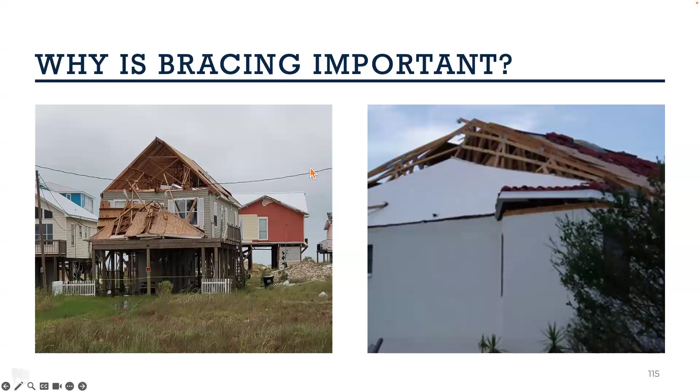A good visual for you of why the bracing is important: these homes had some high wind that came through, and you can see, I'd like to point out to you that the gable end did not go in, it came out. That's what happens when those gable ends are not properly braced. They're going to come out of the home because of the wind and the pressure that gets inside of it. It basically blows that gable end away from the house, and opens up for a lot of that water intrusion.

So that is the silver portion, keeping in mind, and you'll probably hear me say this again, silver includes the roof. So now we're going to talk about the continuous load path. A continuous load path is basically tying everything together as far as the structure of the home from top to bottom. We want to make sure that with a continuous load path, the home has its best chance to survive either a hurricane or a high wind.

Let me go back. Let's start that video. Oh no.

I apologize. There must be some sort of problem with that particular slide.

So the keys to preventing that are along the force path, which is the way that the wind flows across the house. The keys to that are keeping that force path properly connected to each other.

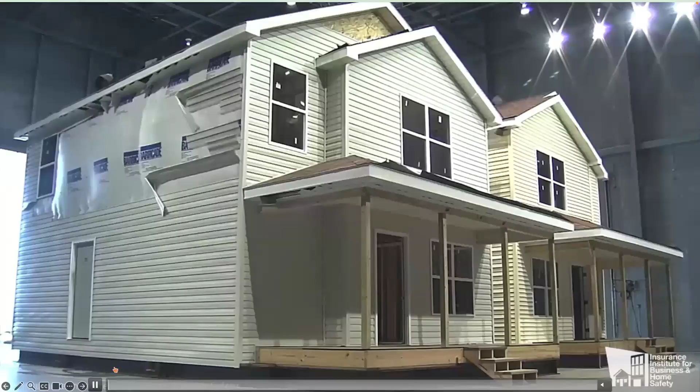The home that is on the right in this video is the same house through every single one of these tests. The home on the left is not. The home on the right is a fortified house. Each of these houses are failing in different manners. The first one was blown off of the foundation. Now we have the roof coming off of that one.

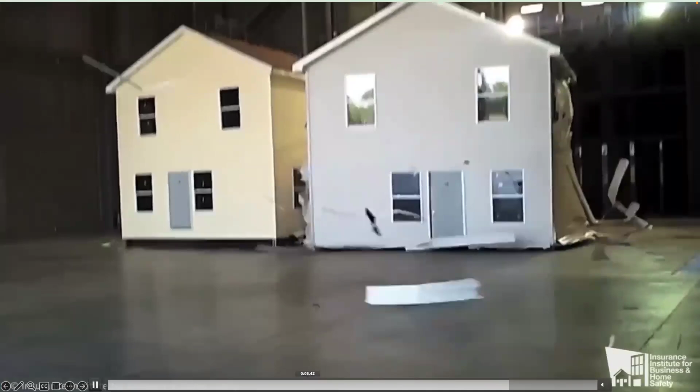What if I told you that the difference in cost in building these houses was $3,000? The home on the right had $3,000 worth of extra hardware in it that kept that home standing. So for $3,000 more at the build of this home, that home was secure against the wind speeds that we're seeing.

So let's talk about what makes a home eligible for a fortified designation. Not all homes are eligible for the fortified program. It is possible for new and existing homes, though, to be eligible. Single family detached homes, duplexes, townhouses, and manufactured homes can qualify for a fortified designation.

With manufactured homes, though, I want to point out that the requirements are that it was built after July of 1994, and that it meets HUD Wind Zone 3 standards. It must be permanently secured to a foundation, so the manufactured home must be sitting on a secured permanent foundation. Those eligibility requirements for the permanent foundation can be found within the HUD requirements.

If you'll notice, I did not mention multifamily or commercial fortified standards. Multifamily or commercial units are not eligible for a home designation because they would fall under either the fortified multifamily or the fortified commercial standards, and we're going to touch on those just a little bit here in a few minutes.

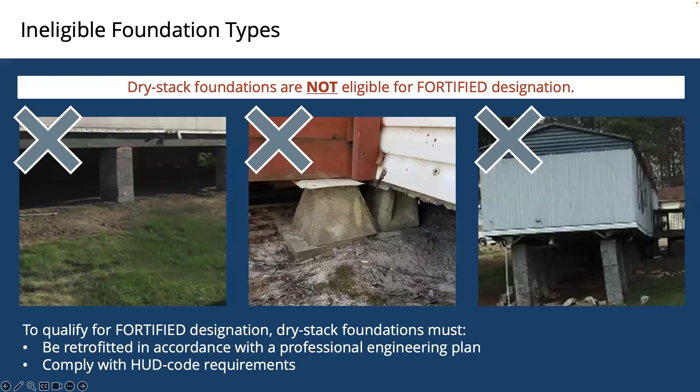So that was what wasn't — what foundations did not qualify. Let's talk about the ones that do.

A solid foundation is essential because it provides two primary functions for the home: it uniformly distributes the weight among the load-bearing walls to the ground underneath, and it prevents moisture and groundwater from entering the home. So slab on grade, homes with elevated floors not slab on grade that have a positive connection from the floor or wall structure to the supporting foundation, including homes with crawl spaces, stem walls, post and beam, or pilings. Keep in mind HUD manufactured homes.

The other piece that would disqualify a home for designation is the structural members of the roof, such as the trusses and rafters. They have to be a minimum 2-inch nominal thickness lumber, spaced no more than 24 inches on center, sheathed with a wood structural panel such as plywood or OSB, and designed by a professional engineer to support all gravity and wind loads corresponding with the site design.

These are two things that would make a home ineligible. How would you know about that if we hadn't talked about it today? Well, that's where the fortified evaluator comes into play.

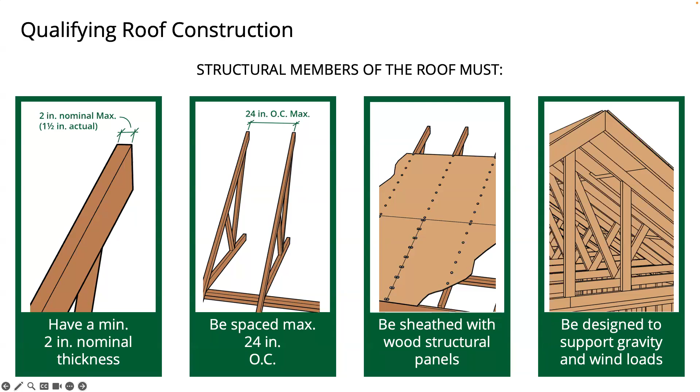That evaluator, before the process starts, is a third-party individual who has been trained by IBHS. They've been through the proper classes, taken the proper test, verified their insurance, and gone through that training process.

The evaluator is the first person who should get involved in the process of getting a designation. They come out and do what's called a pre-inspection, checking out the foundation and looking inside the attic to make sure the spacing and thickness of the lumber up there is correct, that the roof deck is the right thickness, all of those things. They double check it and say yes, this home is eligible, or no, it's not eligible, but here are the things that need to be done to get that home eligible.

The designation process involves five key steps that we're going to talk about now. Getting that evaluator involved from the beginning is very important, and having that evaluator involved the entire time is also important. The homeowner should contact the evaluator before the project begins.

Once eligibility has been determined, the builder or retrofit process for the home would start. The roofer and contractor have to communicate clearly and accurately with the evaluator, because a lot of these things happen in a small window of time. You don't want to slow down the process of the roof or the build of the house, so the evaluator knowing the schedule and being included in that is key to making it as smooth as possible.

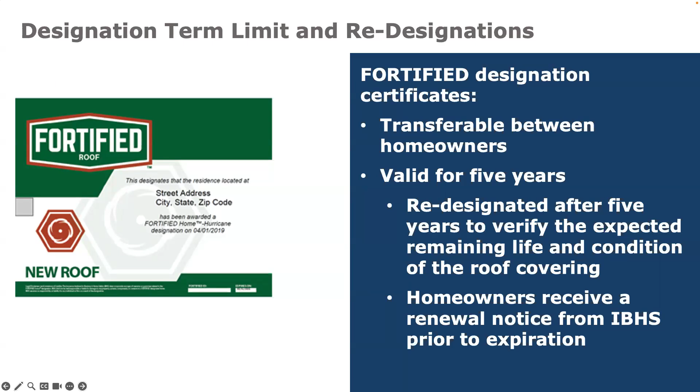At the end of that 5-year time, a redesignation can be given to the home. The homeowner is reminded by a postcard sent from IBHS, and they reach out to an evaluator who comes out and takes some pictures. Most of the time, it's just as simple as taking pictures from the outside to make sure nothing has changed to make the home ineligible, that no additions have been made, and that the shingles have at least 5 years of life left on them.

A couple of things could make the house not eligible for redesignation: construction done without an evaluator, such as adding porches or carports, or enclosing them, requires an evaluator's involvement. Re-roofing or repairing the roof without an evaluator could make it ineligible. Putting solar panels on without the evaluator could also make it ineligible. If doors or windows are replaced, that potentially could make it ineligible too.

Now, all of these things can be done. The key is, just like with wildfire protection, making sure the homeowner is aware that they need to do certain things to keep the designation. If the homeowner puts solar panels on their home, that's okay, they just need someone to double check that they're being installed properly. Depending on how you do it, even adding a doggy door could cause problems with redesignation.

The ideal candidates to be an evaluator: licensed contractors, home builders, roofers, home inspectors, HERS raters, or former insurance adjusters. Any of those folks are good candidates to be a fortified evaluator. Licensed contractors, home builders, and roofers, anyone who does that for a living, are good candidates to put on a fortified roof or build a fortified home.

We can talk more in detail if any of you have questions and want to maybe start yourself or someone you know down the process to become an evaluator or a fortified roofer or professional. We can walk through that process together at a later time if you'd like.

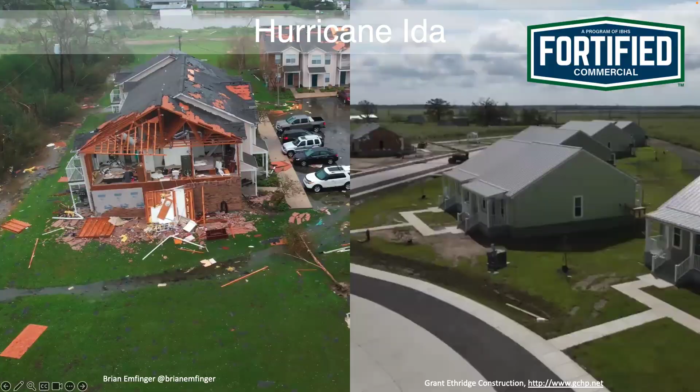But with a Fortified commercial multifamily, there's only the high wind standard, and it is addressing the roof as far as keeping the water out and the roof on. With a Fortified commercial, you're looking at also addressing any of the roof mounted equipment.

The silver level is going to be the building envelope, which are the walls, windows, doors, whether it be personnel or a large commercial door, that's addressed at the silver level. With the Fortified commercial, it also addresses electrical connections for backup power.

And then with the gold level, we're looking at the structural load path, which is the roof to wall connections and the floor to floor load transfer of that building. With Fortified commercial, the structure has to have on-site backup power for critical utilities.

The evaluation process is a little different with a commercial or multifamily building. The first thing you do is submit an application through IBHS's website to make sure the development is eligible. Your plans are uploaded, you answer some questions, and then you work directly with an IBHS authorized multifamily evaluator to document everything along the way.

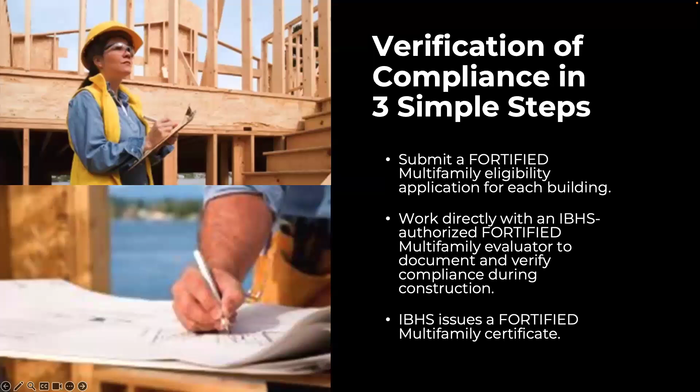There are two firms that handle the multifamily and commercial evaluations, and IBHS will help you get one of those two on board. At the end of it, you're issued that Fortified certificate.